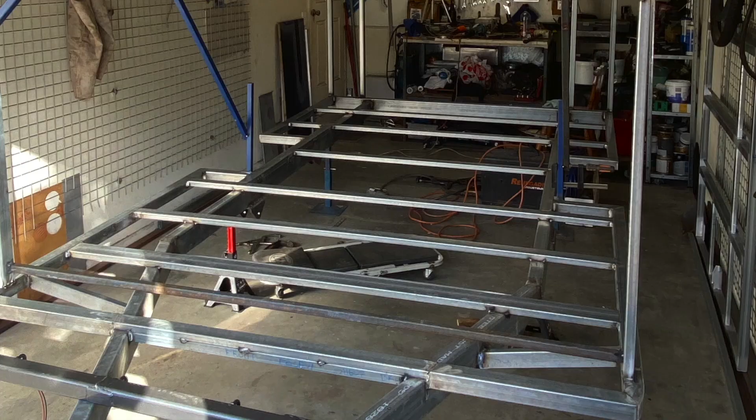Hey guys, welcome to my caravan build. It's kind of like a hybrid caravan toy hauler combo.

As you can see, I've started on it already. It's got the steelwork done and it's all here, ready to go for the walls. I'll show you around, show you all the steelwork, show you where I'm up to, and then I'm going to start the series from this point forward. So let's have a look.

So you can see at the back there, there's the gap where this will be the rear quarter. Your handles to open the tailgate will be up there, and this spot through here is the room for the ramp, so that'll sit on there and then tilt down level.

And you can see over here, that's the ramp that'll be going in that space there I just showed you. So the idea is that if you want to put bikes in there, mountain bikes, motorbikes, kayaks, you can shove in there and take your toys with you.

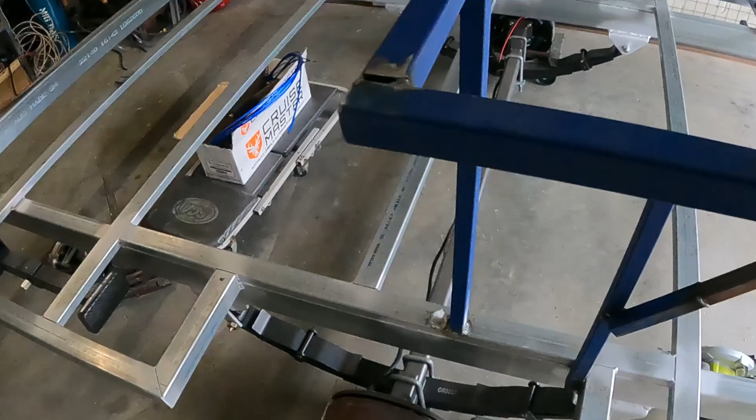And we'll move on to the chassis and the springs. It's nothing flash or special, just keeping it simple - a real simple kind of what we call an outback spring. They're a little bit of an upgrade from just a standard spring. They have a special rebound on them, meant to be better in heavier duty, for going on outback roads and things like that.

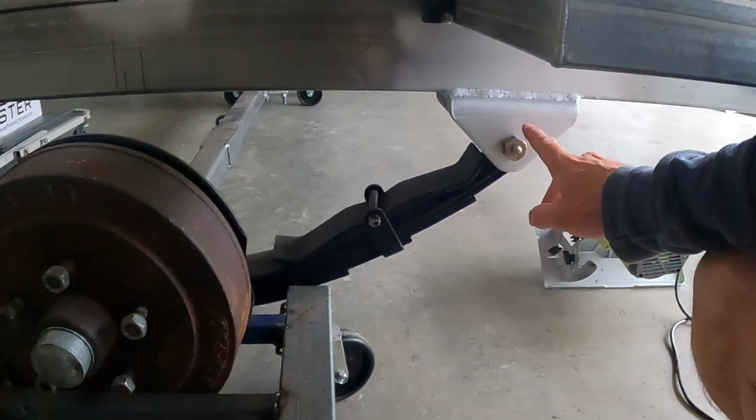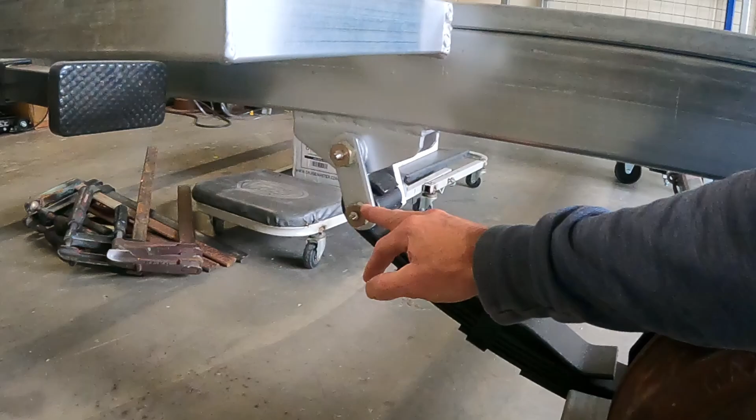And they have greasable pivot points there at the front and a bigger, larger hanger, so you can get more weld on there, which is good for the vibration. And you've also got more pivot points there that are greasable.

Just using a solid stub axle with electric brakes and a Commodore stud pattern. Yeah, it's only rated to 1.5 ton - I'm trying to keep it really light to be able to just carry what I need.

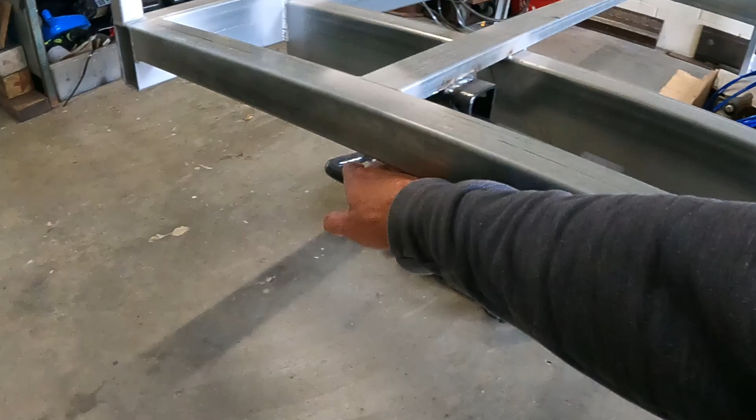And if I need to upgrade that later, I've just got my stabilizers there - I've just welded them on. Nice simple sort of pull, and then twist to level up.

And the chassis, as you can see, is like a 100 by 50, and it goes right from the back to the front, right to the drawbar. So guys, I'll show you my design now here so you get a better idea.

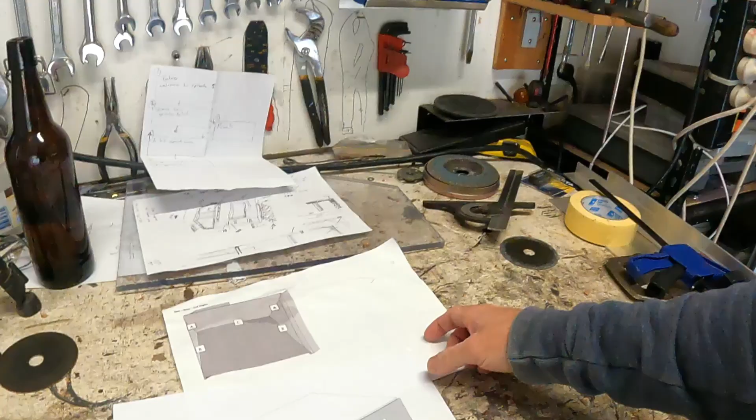I've got it engineered with a guy at work - I was lucky enough to work with someone who's an engineer and can CAD draw it. So as you can see here, that'll be the end goal. That's the fiberglass walls essentially.

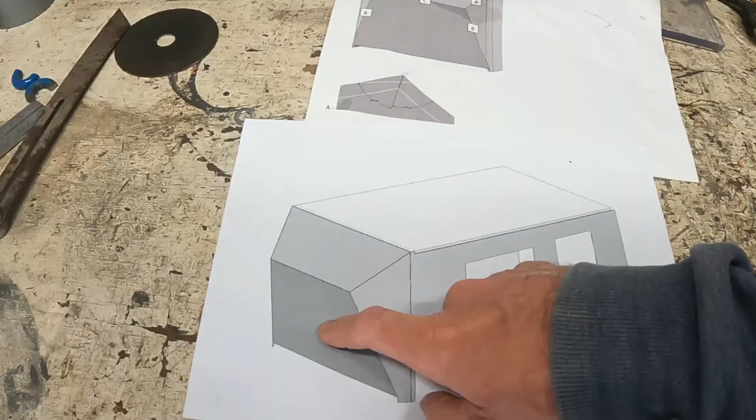And this, I'm doing a bit of a unique front that I sort of came up with - there's one panel that's allowed to be the same on the sidewall, and it'll wrap around to those two panels on the front there. And then that roof there will just hinge off of that hinge there and go up on an angle, and I'll end up having a canvas all the way around that.

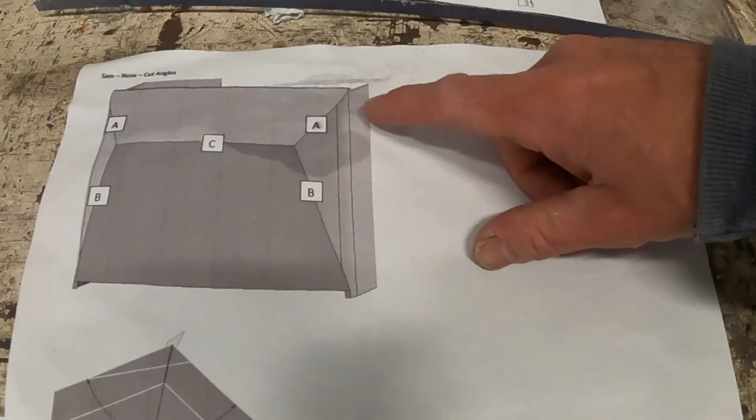And this edge here is actually will be radius. So up on this picture, it gives you a better idea - you see how that's actually like a 250 mil radius, and that's so they all curve around and go in on that angle, just to give it a bit of a unique look. I think it looks good and makes it look cool.

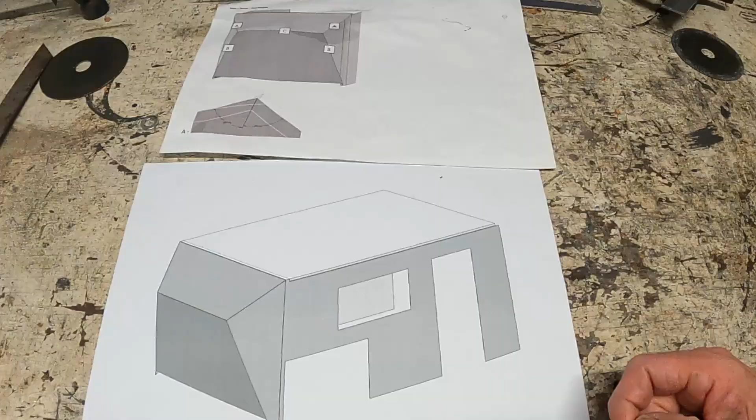So yeah, that's the design there, and I've never built one exactly like this before, but we'll see how it goes. So these composite panels, guys, the fiberglass panels, I'll show you them real quick.

As you can see there, that's the passenger side one there. You can see that front, that special cutout goes there, and then the radius will go right top to bottom. And then we've got this cutout here, and that's for the fridge slide and the kitchen slide out.

And you can see there that we just leave them on until we've glued it to the steel frame. It just gives it that integrity, that strength.

Once it's glued to the steel frame, we just cut it out, trim it out, and put our rubbers on for the door seal. That's the top one cut out, that'll be for the pantry, and another cutout there will be the entry door into the van.

In the very top back panel is the roof, and I'll show you how it's made. It's a cool product that saves time, a bit more expensive than doing the steel and skinning it with fiberglass yourself, but it's like a fiberglass skin on the outside, then a foam, then another fiberglass skin on the other side.

There's two panels here, and this is the foam that's in the middle, using a special adhesive and glue. It glues one side, the fiberglass skin, to that side, and the other side to that, and you get it routed out, with special channels put in for strengthening. That'll be the front walls and the roof.

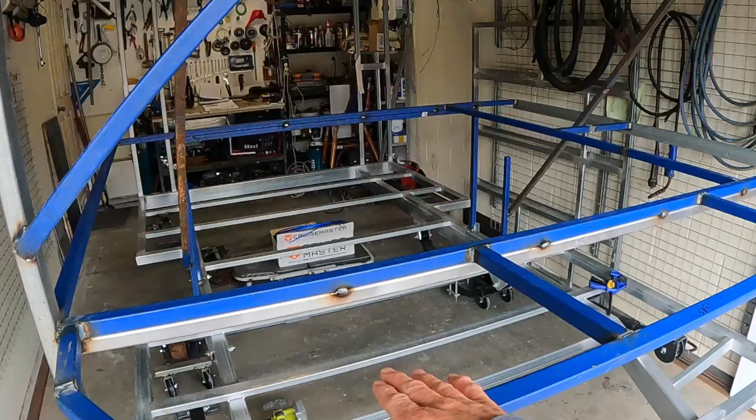So then you see the rail here that goes up to the front and around. All that stuff is staying, and that'll actually be a bed, coming around the front here, a double-sized bed for two adults. It'll have a false floor that hinges up so you can access all the storage in there.

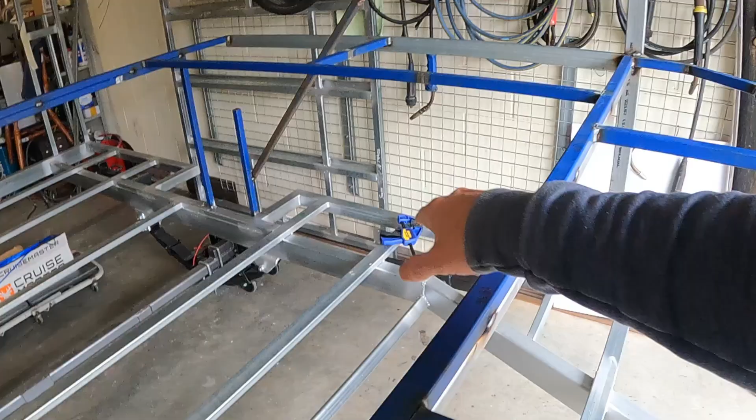I'll show you better plans, but there will also be a slide-out kitchen and fridge on that side, so you can have your kitchen outside. Those braces there are just holding it until we get those panels glued on, and it'll have a tiltable roof, not a pop top or a hard roof, but a tilting roof from the front.

I thought I'd go through what the next step is, what more we have to do, and where we're at currently with the build. I'll show you, and we'll go from there.

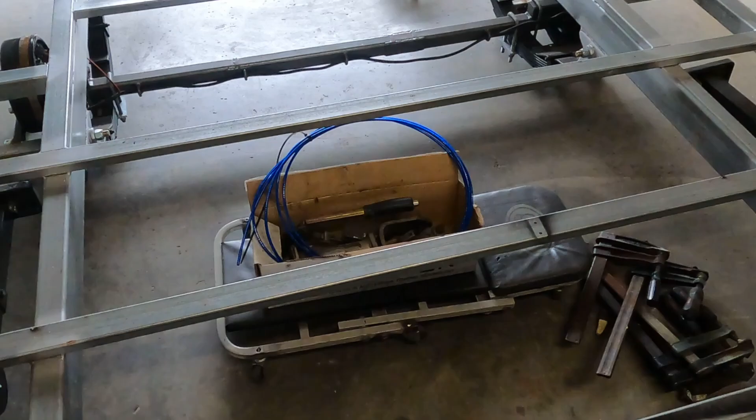Currently, I need to put a water tank into the chassis, so that'll go underneath here, as close to the axle as possible. I'll weld in some rails there, and hopefully get 120 litres of water in there. It'll sit in this area, then run up to the kitchen, with a pump into the kitchen.

I've got my stabilisers on. I'm trying to basically do everything I need to do under the floor, so I don't have to do it under there anymore, and I can access it above instead of just from underneath. We've also got the electric brakes to wire in, and the actual electrical wiring to do.

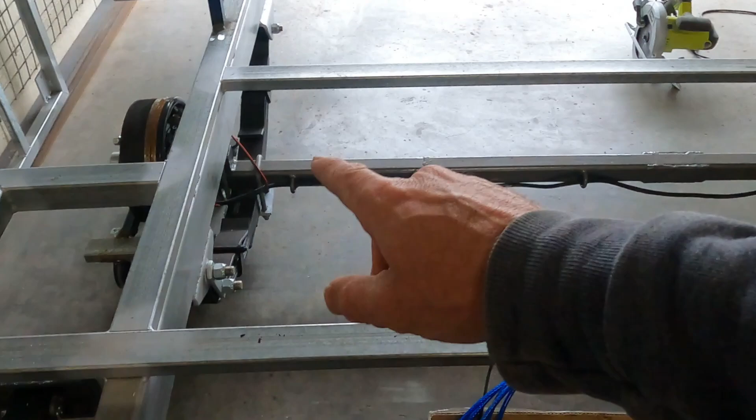Got to put the wire from front to back for the lights and wire in the electric brakes there. Yep, the handbrake and handbrake cable, the hitch there, all that sort of stuff. Even the plumbing, the water hose, got to screw that into the chassis to be able to just tie it up out of the way.

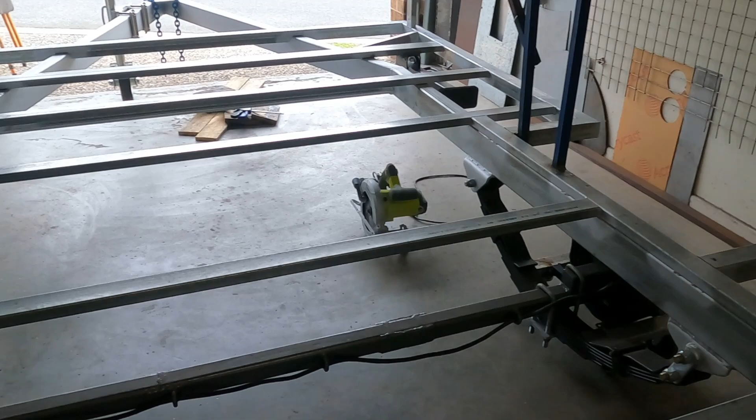A little bit more painting to do. I'd love to sort of paint all that bed frame there. What else is there? Just all those little things that don't sound like much, but it's way harder to do once that floor is on.

So the idea is to get everything done under there, and then we'll be putting the floor on, and then it'll be gluing those fiberglass panels on that I showed you, and they will just sit on top of this 50 by 50 along there, glue there, and then glue into the steel here for the ramp or the rear quarter.

And then glue to that steel that goes up and over and across. So once I'm at that stage, it'll look like a caravan.

There's just lots of little things that take so much time, like wanting to put a battery in here, then wire in some lights for the roof, have switches over there near the pantry. If we have a pump, that'll be on a switch.

I'm just trying to keep it simple too, this build. I'm not being extravagant and crazy, doing things wild. I'm just trying to do things on a budget, just to be able to keep it simple. Even if things later, if I want to add like a shower and stuff like that, that stuff I can add on later.

Right now it's just to get out, go camping with the family, and possibly throw things in, and yeah, we'll go from there. So that's the plan. Stay tuned, hope to have episodes out fairly regularly, and you can see the progress as we go along.